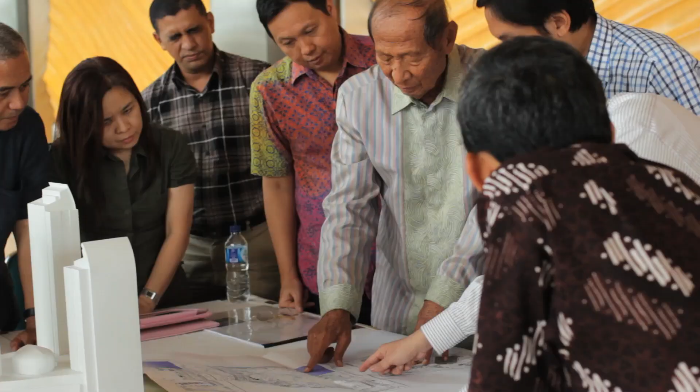He always starts with dreams. So he always starts with big dreams, and then he creates and makes the dreams come true and delivers the property. As a person, he's very goal-oriented, and he knows how to mobilize people and influence them to believe in him and to do according to what he plans.

1, 2, 3, he's a visionary. That's the secret of his success. Something that maybe is not learned, is just talent, or something that he just has, that vision.

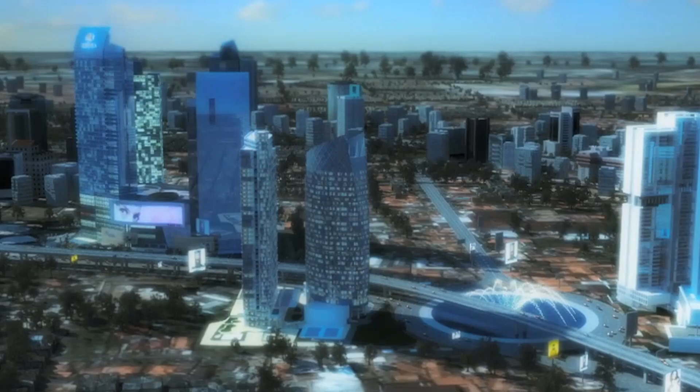Situated on 15 hectares of land, when completed, Ciputra World Jakarta will have 15 towers, divided into 3 zones: Ciputra World 1, 2, and 3.

The landmark project started with Ciputra World 1, a mixed-use development situated on 5.5 hectares of land, with 2 office towers, an extensive retail mall, 2 residential towers including serviced apartments, and the prestigious Raffles Jakarta Hotel.

At the heart of the development, on top of a 14-story podium, is Ciputra Artpreneur. Artpreneur is both a venue and a concept. Originally it started as a way for the owner, Pak Ciputra, to highlight Indonesian art.

This is the brainchild of my father. As a developer, he builds many malls, but he thought he had to have something unique in the mall.

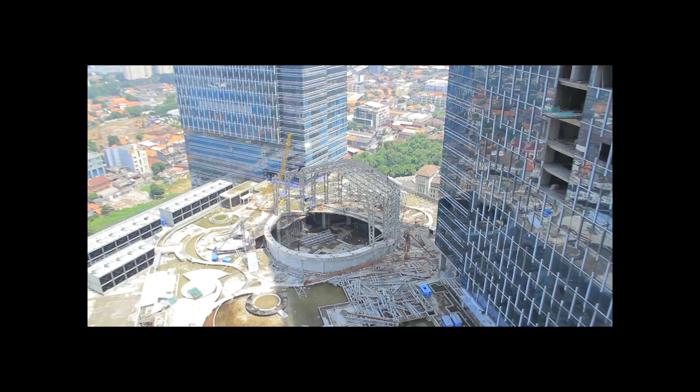And then I said to him, how about having a theater? A proper theater, something you can perform in, something from overseas. And then he was excited about the idea and started the challenge, because the building was not designed to have a big theater on the 13th floor.

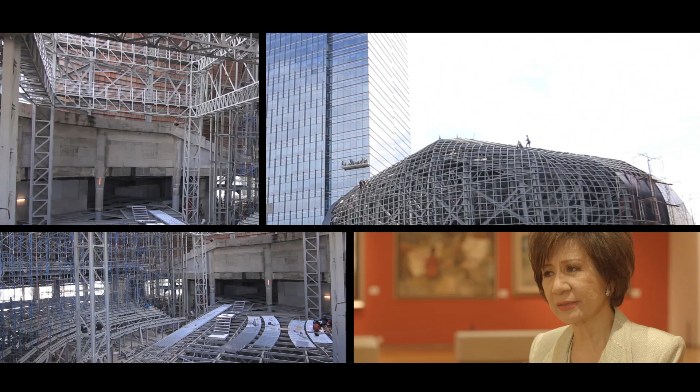But I really enjoyed the process. Everything took about 3 years to develop. We managed to reallocate certain pillars, we managed to heighten certain floors, so at the end we have the 1,200 seater theater.

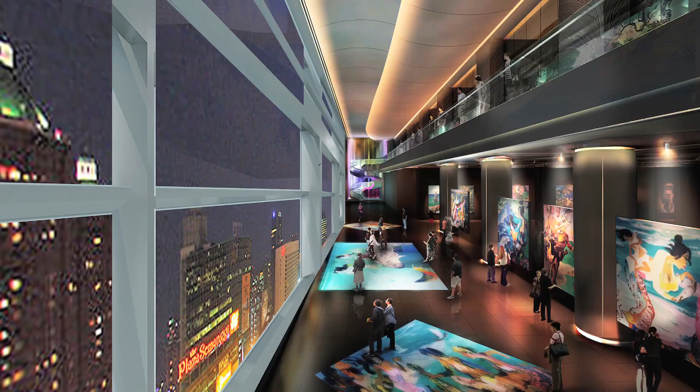Well, for Jakarta, this is really the beginning of something new. For a major metropolitan city, they've had very little in the way of performing, visual, and public art. People are crying out for cultural diversion, cultural enhancement.

The producer of the Broadway show had come to Indonesia 3 times before. And when they found us, they said, okay, this is the one. So our theater's specification, the sound system, the acoustics, the support from the back room, like the amount of dressing rooms, supported and qualified for the Broadway show. And that is the highest level you can go.

The official opening of Artpreneur was designed to coincide with a very special occasion, a crucial one: the owner, Pak Ciputra, wants to celebrate his 60th wedding anniversary here. Obviously, that's something that only comes once in a lifetime. We cannot fail. It is an impossibility.

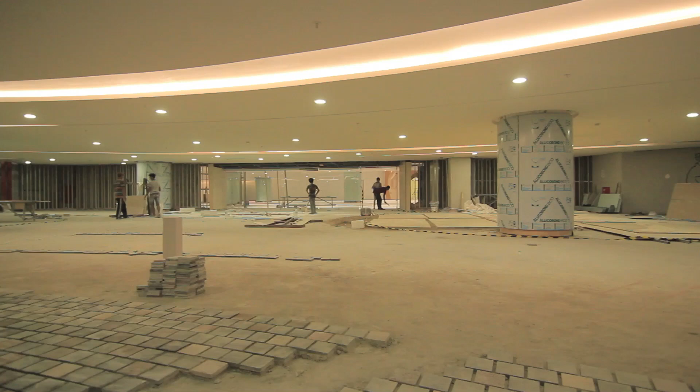We're putting on what they're calling an operette, an original musical based on the life of Pak Ciputra and his wife. We're expecting roughly about 2,000 people, a big dinner in the ballroom next door. So there's a lot of work to be done.

The special theatre performance celebrating the story of Ciputra's life was written and directed by Ari Tulang.

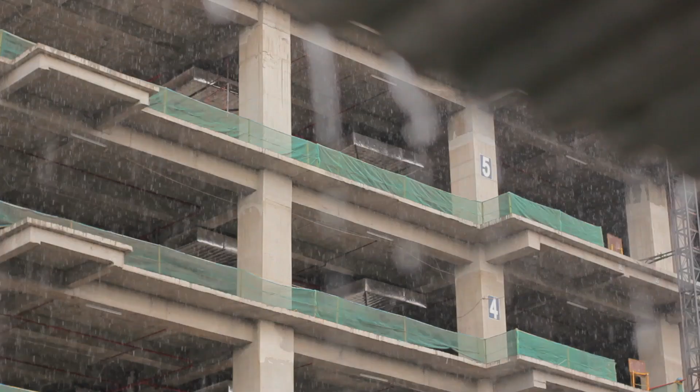Over the decades of its existence, the group has faced many challenges. Perhaps the most serious of these was the Asian financial crisis of the late 1990s. Of all the countries in the region, Indonesia was the worst affected, with the value of the rupiah plunging to a new all-time low. The property sector was hit hard, and with it, the Ciputra Group.

During the Asian crisis in 1998, the group almost collapsed. But rather than getting down in the dumps and saying, oh, life's over, I've lost my billions, or many hundreds of millions as we would have had at the time, instead he picked himself up and said, right, what other markets are still moving? What other markets have potential for us? Let's take some of the funds that we have offshore and put them to work and rebuild.

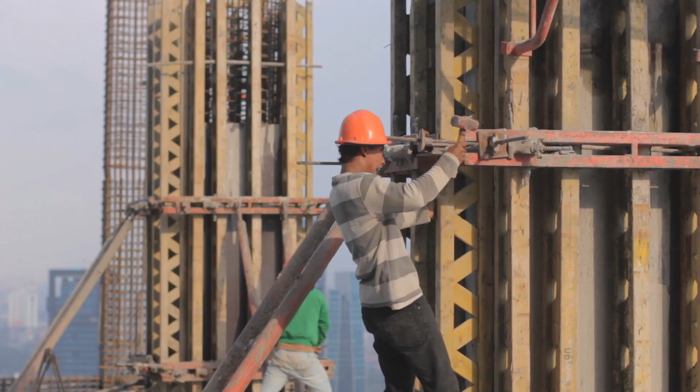When work began again on Ciputra World 1, 10 years after the financial crisis, the blueprints for the project had changed considerably, presenting new challenges.

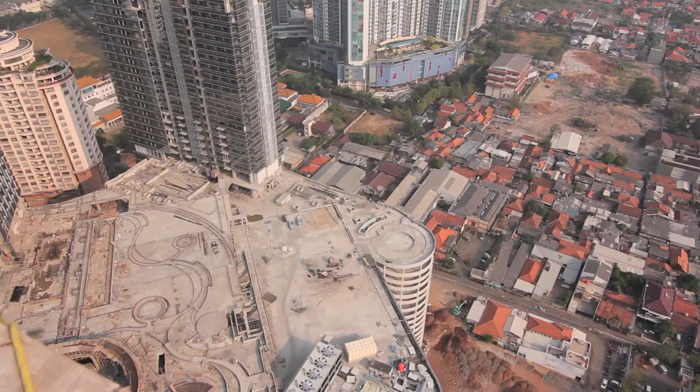When the project was first developed, the overall area of development was 350,000 square meters. And so what happened is now the project is in fact 550,000 square meters. So the difference in weight of the whole project is considerable.

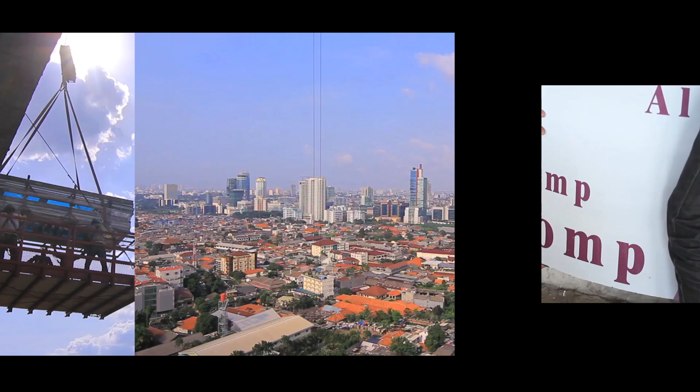The total area of Ciputra World 1 Jakarta is 665,310 square meters. Construction required 390,000 cubic meters of concrete, 68,000 tons of steel, 137,500 square meters of glass, 36,000 square meters of aluminium composite, and 250,000 square meters of stone and marble. Providing access throughout the development, there are 90 elevators and 96 escalators.

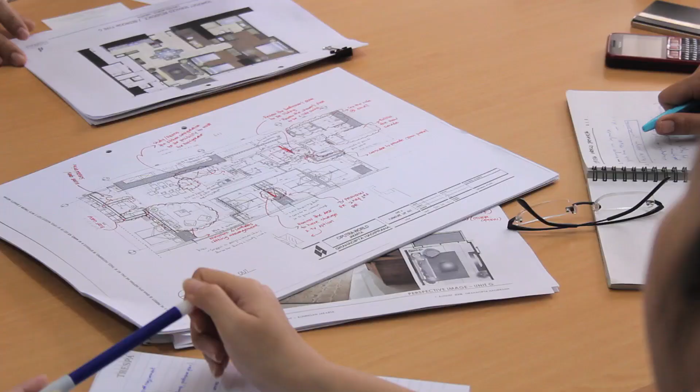In managing a project of such immense scale, careful coordination between in-house teams and external experts would be the key to success.

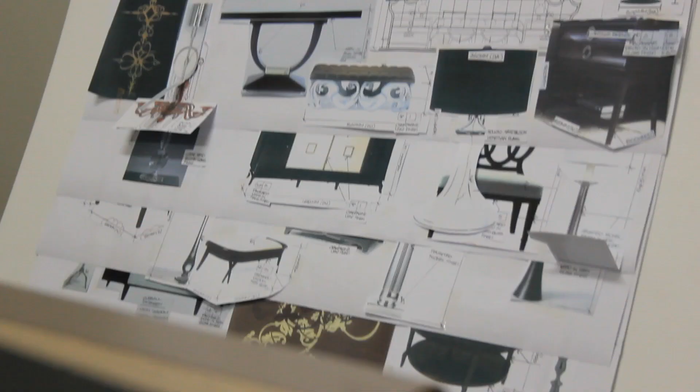Within Ciputra you have in-house teams, which include architecture and interior design, and they have a specific role within Ciputra.

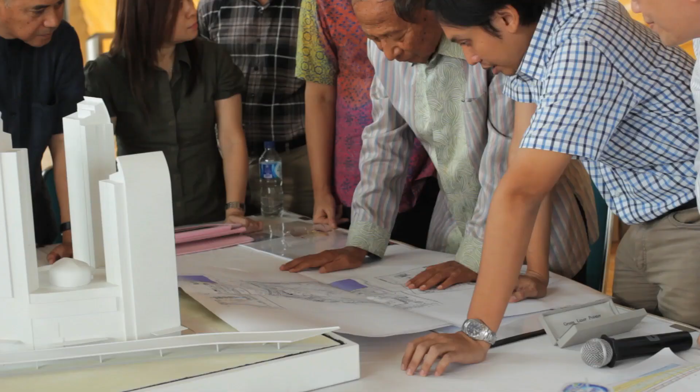In my time here, they have coordinated very tightly with Pak Ciputra himself. I strongly believe that although Ciputra is the stakeholder, the initiator of all this work has been Pak Ciputra himself.

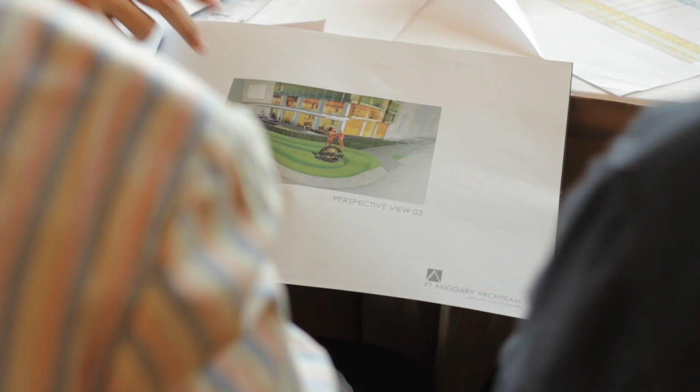I think one of the best things for me is that Ciputra culture has trust also in the professional. So vision comes from the owners, but implementation is done by professionals like me. I have satisfaction in contributing my own capabilities and role in this project. I think that's more meaningful than financial reward.

Another important factor in Ciputra's success has been the ability to find like-minded partners. Ciputra World 1, as you see today, is a true symbol of a lifetime achievement for Pak Ciputra. It shows in the attention to detail, in the passionate selection of artwork, of the different areas and zones. Ciputra aimed to create something very spectacular here, something very unique, and that entails artwork, stories, culture. These are all attributes that Raffles stands for, and therefore this is a very good marriage between Ciputra and Raffles, because both companies follow the same philosophy.

Raffles Hotels and Resorts started with one iconic hotel 127 years ago, the Raffles Hotel in Singapore. From the Raffles Singapore birth onwards, we branched out to other locations such as Cambodia, where we have Phnom Penh and Siem Reap. Later on we also expanded into new areas such as the Middle East, Dubai, Paris, Beijing, Sanya, Istanbul, and now very soon in Jakarta. Jakarta will be another iconic addition to the collection.